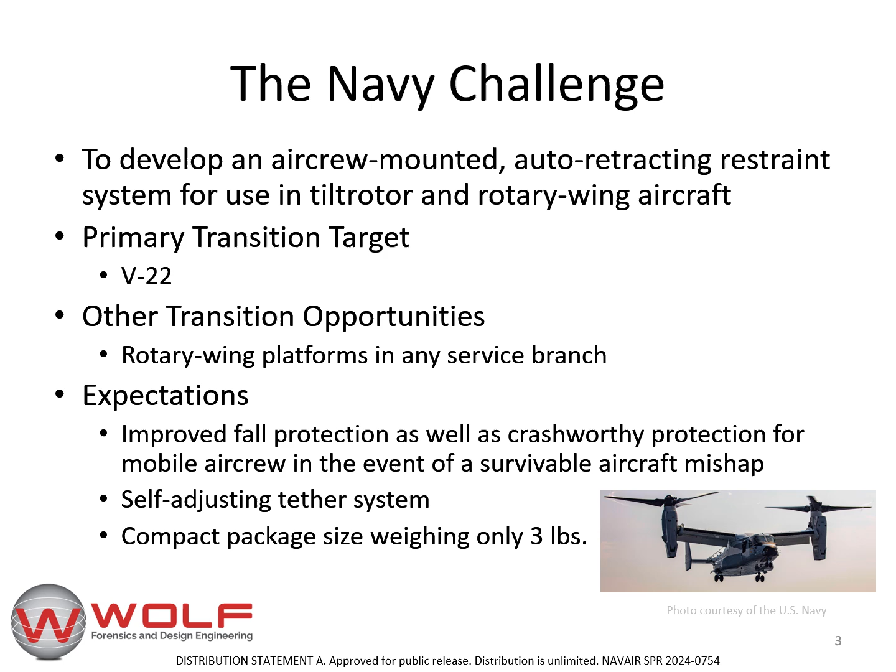The expectations for this system include improved fall protection and crashworthy protection for mobile aircrew in the event of a survivable aircraft mishap. The system must be self-adjusting so that it retracts webbing and prevents slack buildup. The system must also have a compact package size and weigh less than 3 pounds.

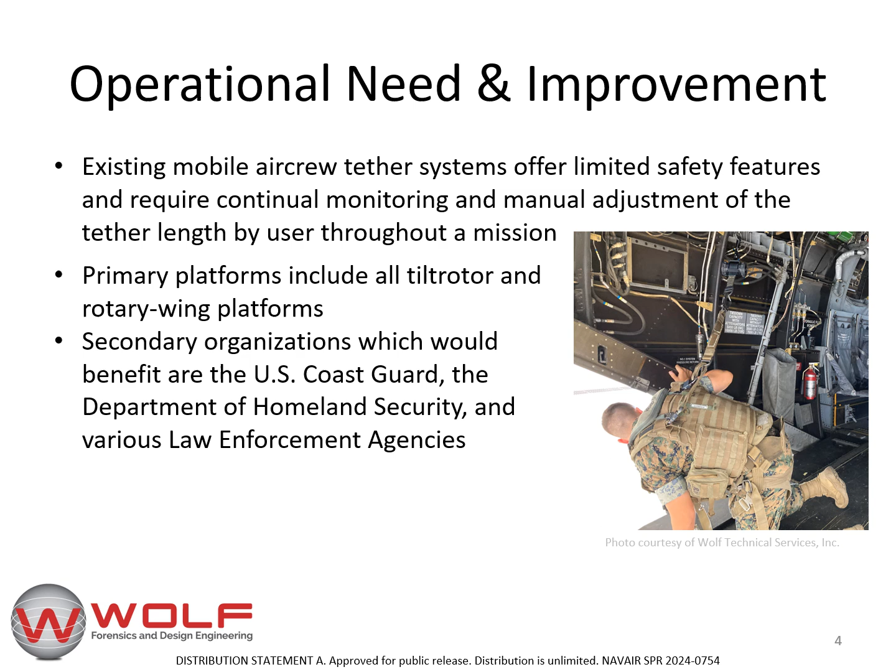The operational need is to improve upon the current mobile aircrew tether systems, which have limited safety features. These are often fixed-length straps, which require continual manual adjustment. The adjustment process takes additional time that could be utilized for mission duties, and the continual monitoring can cause this process to be neglected. A new device, such as the one pictured here provided by Wolf during a Marine Corps user evaluation, can provide improved safety and mobility for all tilt-rotor and rotary wing platforms.

To meet this need, Wolf Technical Services developed a solution that is a direct replacement for legacy systems, so it requires no airframe modifications. Our tether provides improved safety and mobility for aircrew, with increased survivability.

Pictured here is the current prototype, a production equivalent unit with which we were able to show improvements over existing methods, including compatibility with existing systems that will attach directly to aircraft attachment points, improved functionality, usability, and mobility from the automatically adjusting webbing payout and retraction, with a 5,000-pound working load, compact package size weighing less than 3 pounds, and most importantly, designed to provide reliable fall and crash protection while allowing aircrew the freedom of motion throughout the cabin without inadvertent lock or release while performing typical mission duties.

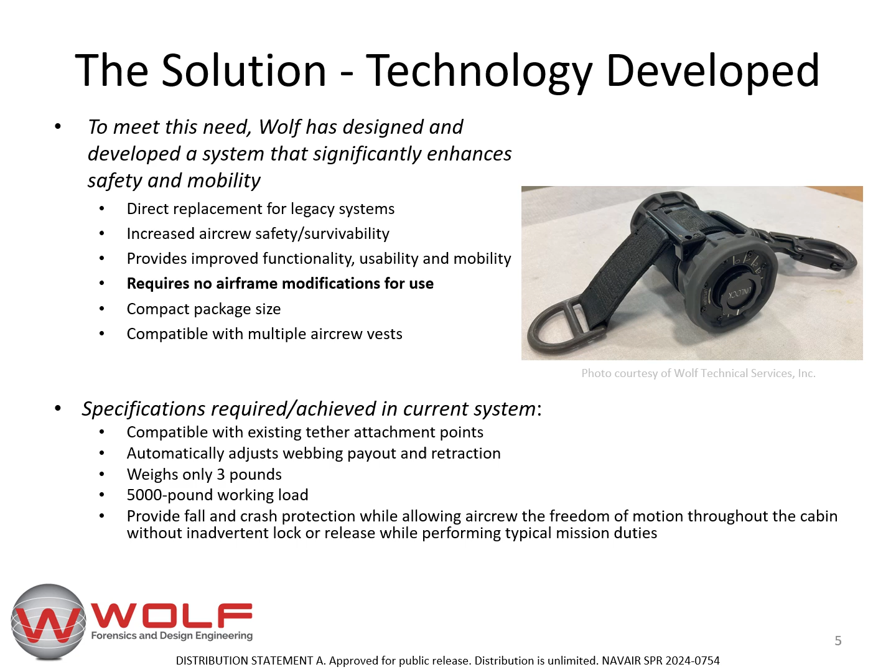Since submitting this status document for PAO approval in July 2024, we have had to shift completion of the lab qualification testing to the third quarter 2025, rather than completing in the first quarter 2025 as we originally planned. This is still well within the schedule set by NAVAIR for the project, and we're on track for third quarter completion.

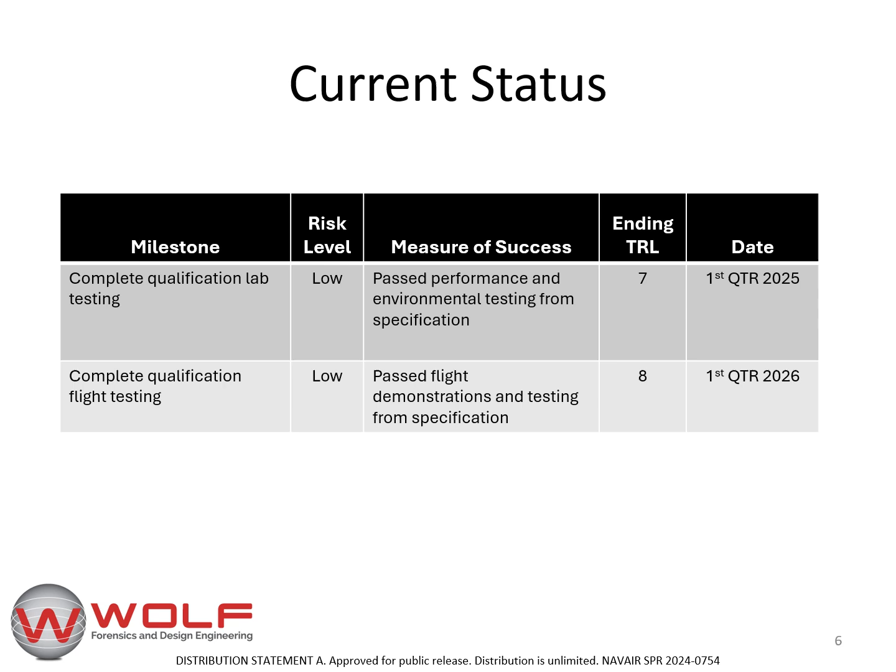We have recently passed developmental performance and environmental testing, with required qualification laboratory testing to immediately follow. Flight demonstrations and testing from specification are still anticipated to be completed in 2026. The primary differentiators for this system versus current technology include slack management, velocity lock, and payout control functions.

Current fixed-length systems create webbing slack, which can cause a trip hazard for mobile aircrew. Wolf's system retracts webbing to prevent slack from building up on the floor.

Wolf's system also has a velocity locking feature, which prevents the webbing from extracting after a threshold aircrew velocity has been exceeded. This is similar to a seatbelt in an automobile: during a crash event with a high enough velocity, it locks and prevents further webbing excursion, keeping mobile aircrew from exiting the cabin or striking other obstacles.

But much like a car seatbelt, current restraint systems with this feature go right into locked mode when reaching a certain speed, regardless of whether it's a real safety issue, which can interrupt mission duties. This is called a nuisance lock. Wolf's intelligent load lock feature senses the load in the webbing and only locks during a significant fall or crash event, preventing unnecessary stops. Nuisance locks were a highlighted deficiency of previously fielded systems that this feature fixes.

In addition, Wolf's system has a payout control feature, which allows the aircrew to set a certain webbing payout length, creating a safe zone to perform mission duties. This feature can also help prevent aircrew, especially those working near an opening, from exiting the aircraft unintentionally.

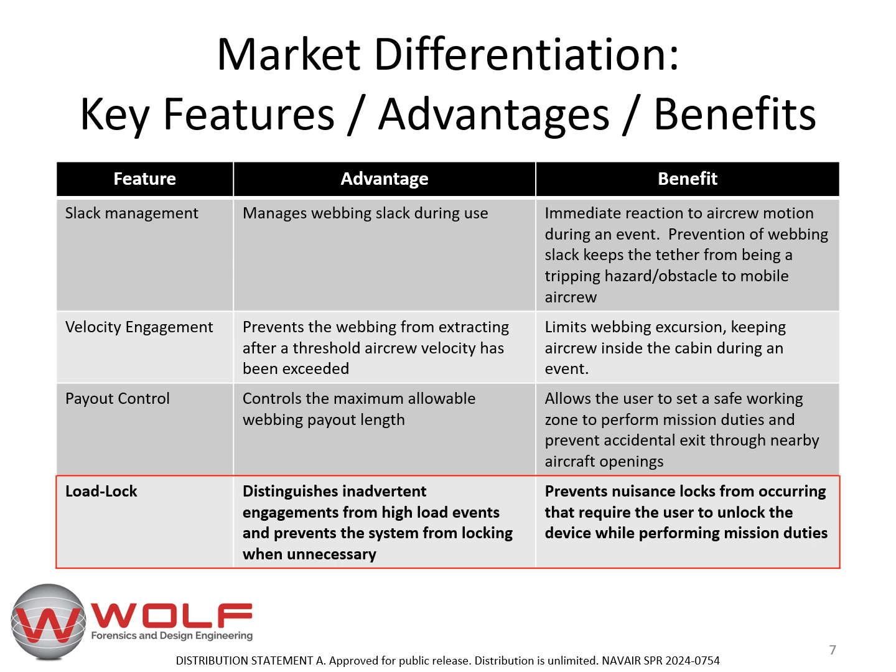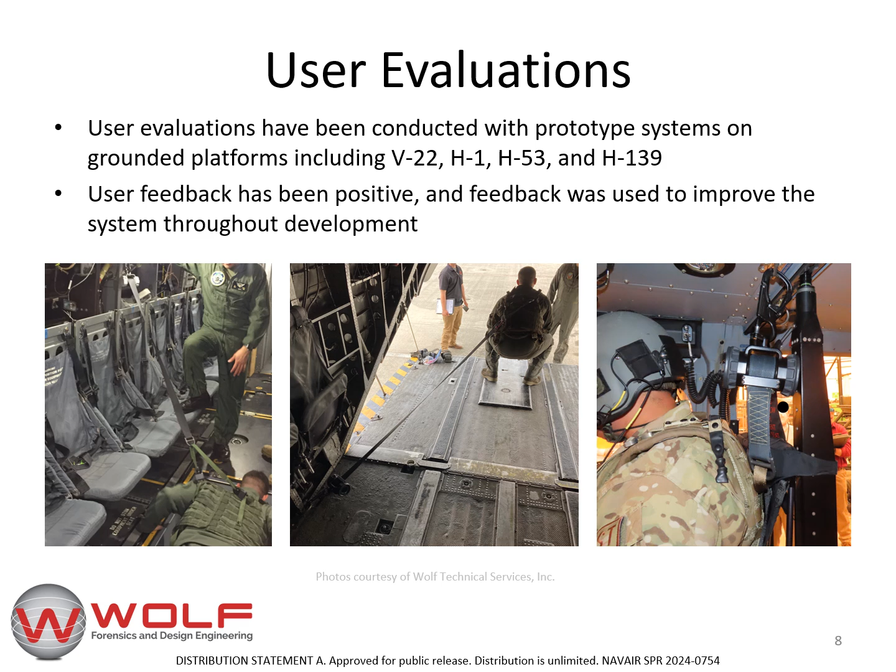In 2023 and 2024, Wolf began a series of end-user evaluations with our prototype tether systems on grounded V-22, H-1, H-53, and H-139 platforms. We were excited to receive excellent positive feedback and used aircrew suggestions to make iterative improvements to the system throughout our development process.

Wolf's dynamically adjustable tether system does not require modifications to the aircraft for use, but is designed to be used on aircraft integration points already in use by existing fixed-length tether systems. These attributes allow this system to be easily integrated into multiple platforms without the need for additional budget or engineering exercises generally required for aircraft modifications.

Wolf Technical Services, in conjunction with the Navy program sponsors, plans to complete flight qualification activities. We utilize a contract manufacturer with experience in manufacturing military products to manufacture, package, and ship the end product. An initial production run was completed in 2024, so we're immediately prepared to support future flight tests and additional customer interest.

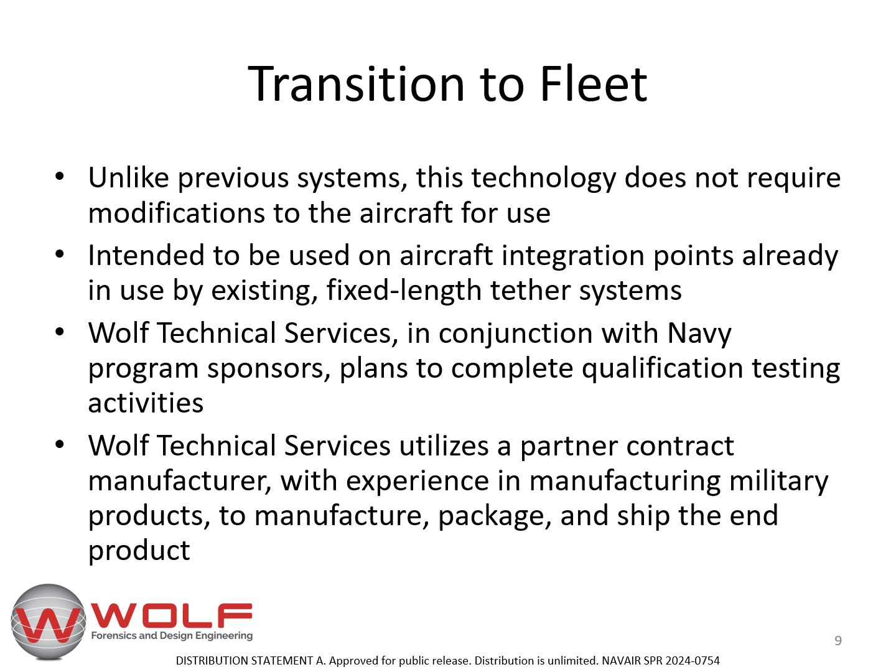The initial target platform for Wolf's tether system is the V-22, although this system has application in any mobile crewed aircraft across multiple defense services. It also has applicability for law enforcement, medical evacuation, and rescue services. This system could also potentially be used as a fall protection device in industrial applications.

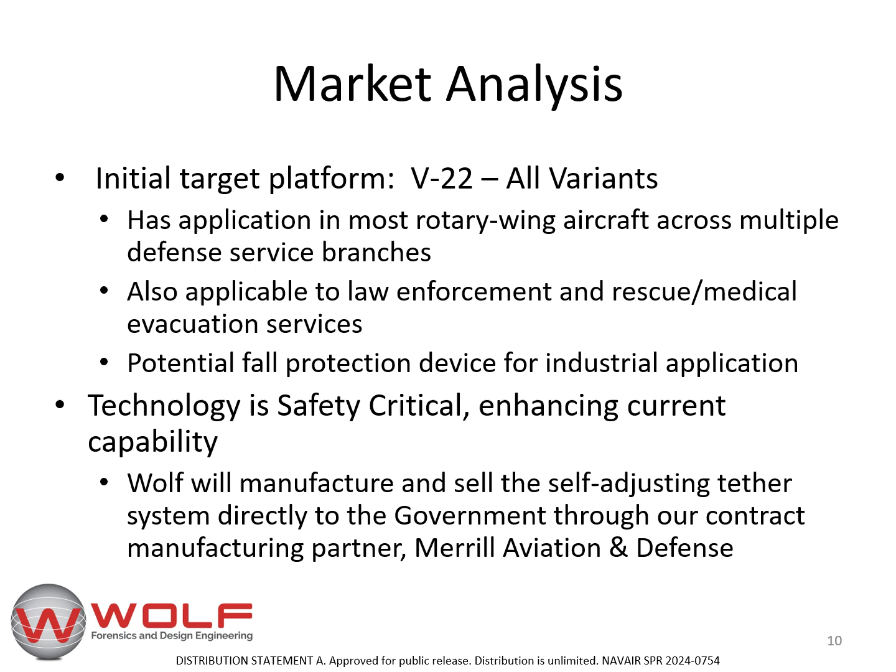Wolf's current business model is to obtain support from NAVAIR program management stakeholders for acquisition of initial units and flight certification activities. Our first platform of interest is the V-22, and we plan to scale to support other platforms as our tether system is independently identified as a Phase 3 action for future year budgets to replace existing stock. With a successful Navy launch, we will identify and market to other service branches with compatible aircraft platforms who currently utilize the legacy fixed-length tether system.